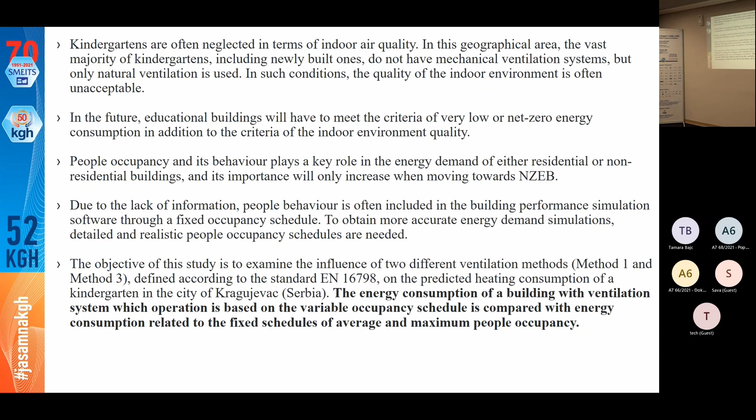As I said, two ventilation methods were considered, method 1 and method 3. In method 1, two ventilation requirements were selected, the C1 and C4 air quality categories, which are characterized by the highest and lowest level of quality. And the simulations performed in the EnergyPlus software are related to all three levels of building pollution, very low polluted and low polluted buildings. According to method 1, the operation of the ventilation system is conditioned by people occupancy or presence of children in the kindergarten,

while the ventilation requirements for method 3 do not depend on the people occupancy, which means that the value of 0.5 air changes per hour was adopted as the ventilation requirement. So three types of people occupancy were defined: real occupancy, which means variable weekly occupancy schedules, and average yearly and maximum occupancy schedules, which are fixed schedules. For the fixed schedules, the fresh airflow rate is constant during the heating period.

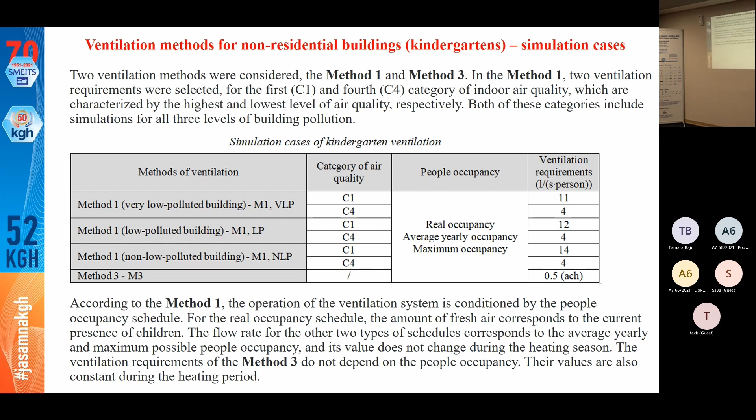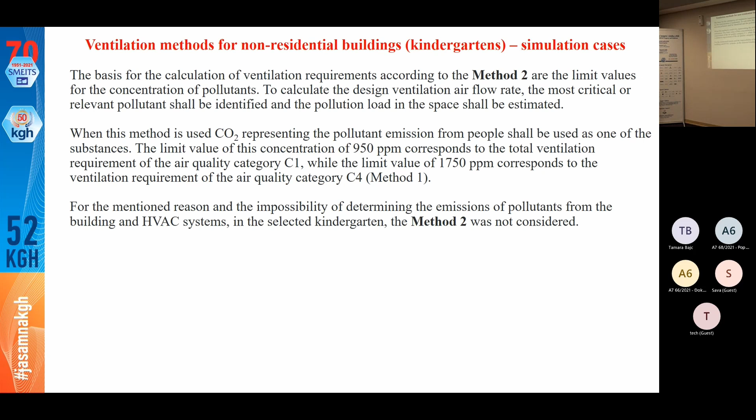Method 2 was not considered due to the impossibility of determining the emissions of critical or relevant pollutants for building and HVAC systems, and due to the fact that the limit values of CO2 concentration of 950 and 1750 ppm correspond to the C1 and C4 air quality categories of method 1.

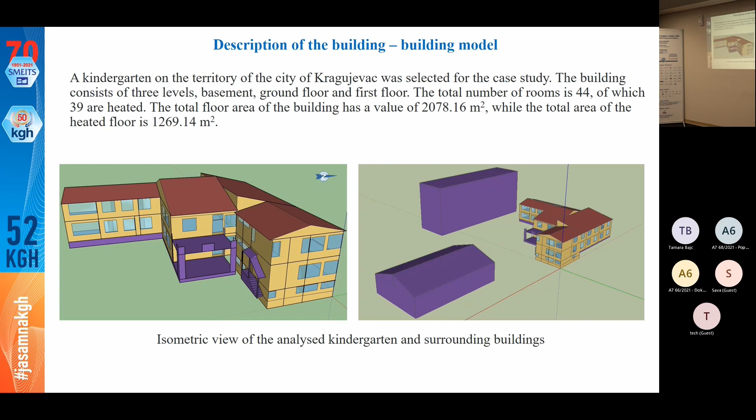So on this slide you can see the selected kindergarten. It is an existing kindergarten in our city. It consists of 3 levels. It has 39 heated rooms and a total heated floor area of 1270 square meters. It is surrounded by buildings that affect its heating consumption. So this is a residential building and this is the school building. The 3D model was made under the assumption that the overall heat transfer coefficients of all building constructions of this kindergarten fulfill the criteria of our national rule book on energy efficiency of buildings.

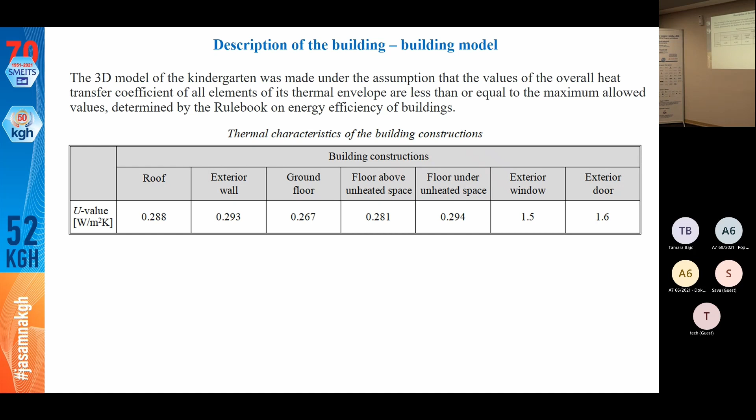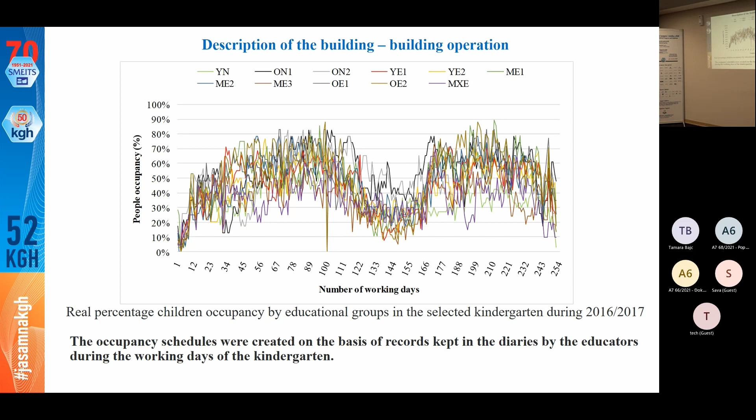Beside the variable weekly schedule, we defined 2 fixed schedules: average yearly and maximum people occupancy schedule. So the average yearly schedules are determined on the basis of the real children occupancy of the corresponding educational group, but from 6 kindergartens in the same city for the period of 3 years, from 2015-16 to 2017-18. So in this table, you can see that it ranges from 44% for the younger nursery group to approximately 57% for the younger educational group.

The maximum people occupancy schedule is based on the highest possible presence of children, which means that during the heating season, the people occupancy is 100% all the time.

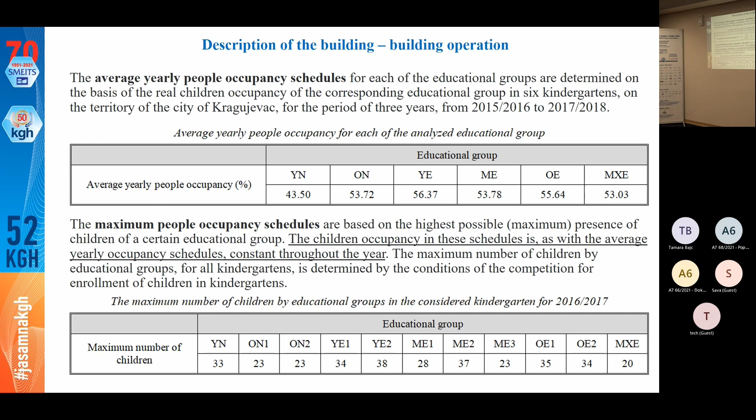Ventilation in this kindergarten, as well as in the other kindergartens, is performed naturally by opening the windows. Although there is no mechanical ventilation system, we assume that these systems, but without heat recovery for now, are installed in order to establish and maintain the proper quality of indoor environment. Only the rooms where children stay are ventilated.

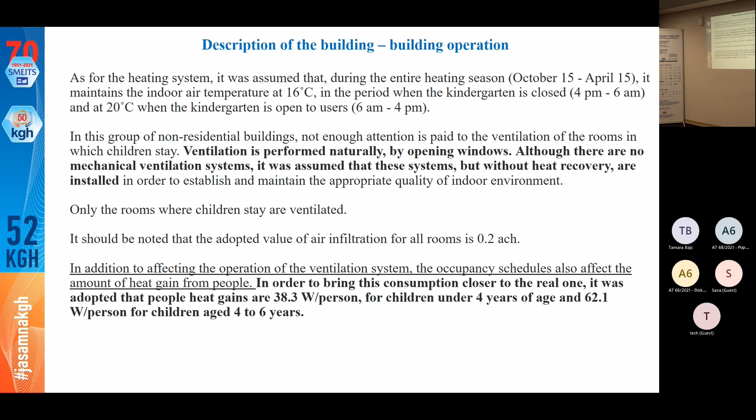And in addition to affecting the operation of the ventilation system, the occupancy schedules also affect the heat gains. In order to bring the predicted consumption closer to the real one, we adopted the children heat gains from the literature. Okay, here are the results.

You can see the predicted heating consumption of the kindergarten for ventilation method 1, and air quality C1, non-low polluted building, and air quality C4. So blue bars represent the consumption for the real occupancy, red for average yearly, and green for the maximum occupancy. So the heating consumption increases, as it was expected, with the increase of the amount of fresh air from C4 to C1 NLP.

For C4, ventilation requirements amount to 4 liters per second per person, while for the C1 category, NLP, they amount to 14 liters per second per person. On the other slide, you can see the predicted heating consumption, but for method 3, for which ventilation requirements are 0.5 air changes per hour.

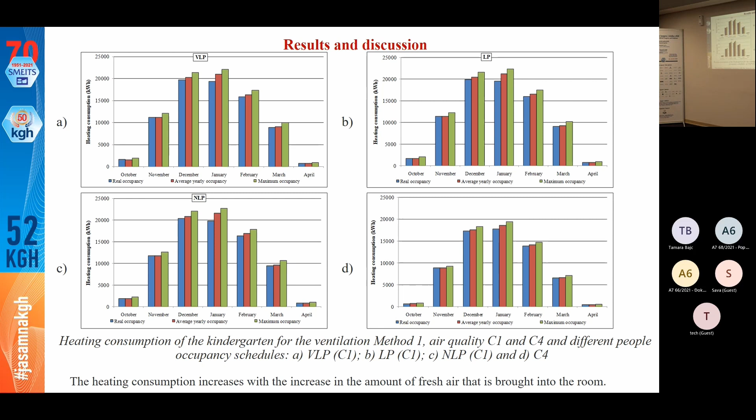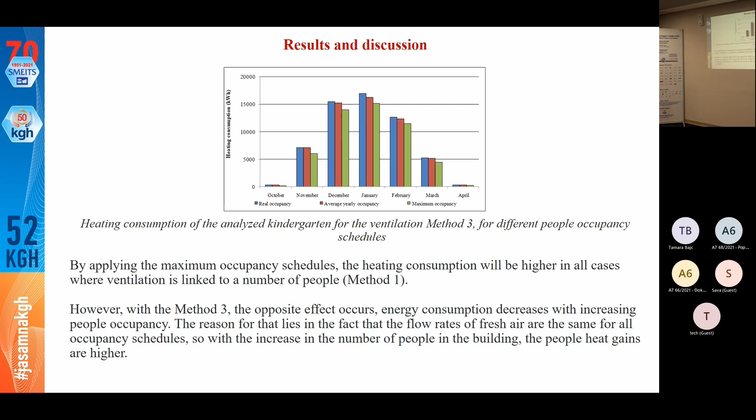Okay, with method 3, we have the opposite effect, which means that the energy consumption, as you can see, decreases with the increase of the people occupancy. Why? Airflow rate is constant. It depends only on the volume of the ventilated rooms. When we have a higher occupancy, it means that we have higher heat gains, and in that way, lower heating consumption.

So the results show that when we compare real and average yearly occupancy, the deviations amount up to 3.9% for method 1 and 2.4% for method 3, which means that the error in predicting heating consumption is negligible. On the other side, if we compare consumption for the real occupancy schedule with consumption for the maximum occupancy schedule, the error is significant, up to 10.8% for method 1 and 11.4% for method 3.

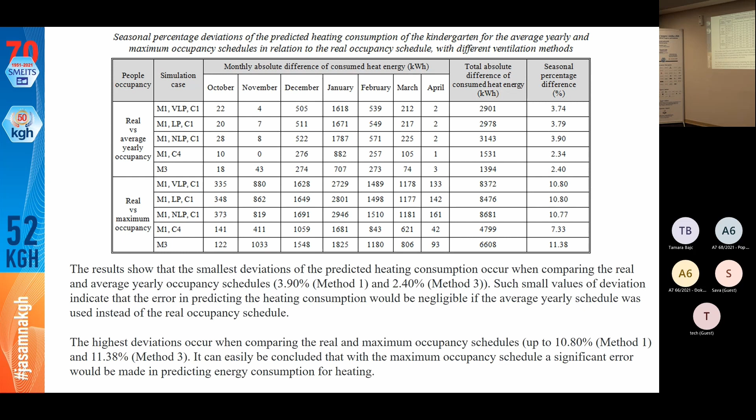Okay, so what are the conclusions? In building performance simulations, if we use average yearly people occupancy schedules, the error in predicting consumption is around 3.9%, around 4%, which at first we can say can be neglected.

But the question of the value of the error in predicted electricity consumption of the ventilation system, the fans, as well as the energy consumption of the cooling system still remains open, especially bearing in mind that the children occupancy during most of the summer was extremely low, or the lowest. That will be the subject for future research.

So in order to bring the predicted energy behavior of the building closer to its actual behavior, it is recommended to use the real occupancy schedule if possible. And on the other side, the maximum occupancy schedule should be avoided in any case.